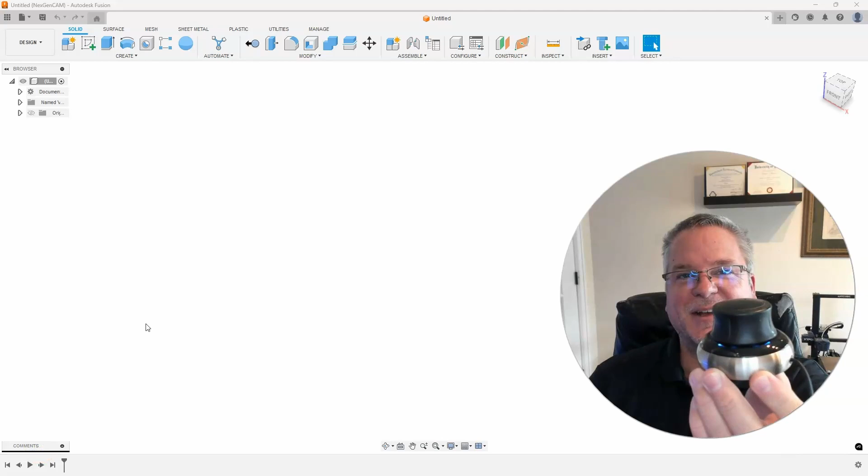This week's video is all about the 3Dconnexion device. Let's take a look to see what this thing can do.

A couple people have reached out to me and asked, how do you get the really nice smooth panning and rotation and zooming that you do inside of Fusion? The reason is because I'm using one of these 3Dconnexion mice that you can kind of see on my camera right here. Now, I've also gotten feedback where people say, well, I invested in one of those, but I found it really difficult to use. The part kept flying off the screen. I could just never get used to it.

That's because out of the box, there's some settings that I personally don't like and I've changed. I think it makes way more sense with the settings that I have set up. I'm going to show you those settings, and hopefully that will help you if you currently have one of these 3Dconnexion mice, or if you think about getting one of them.

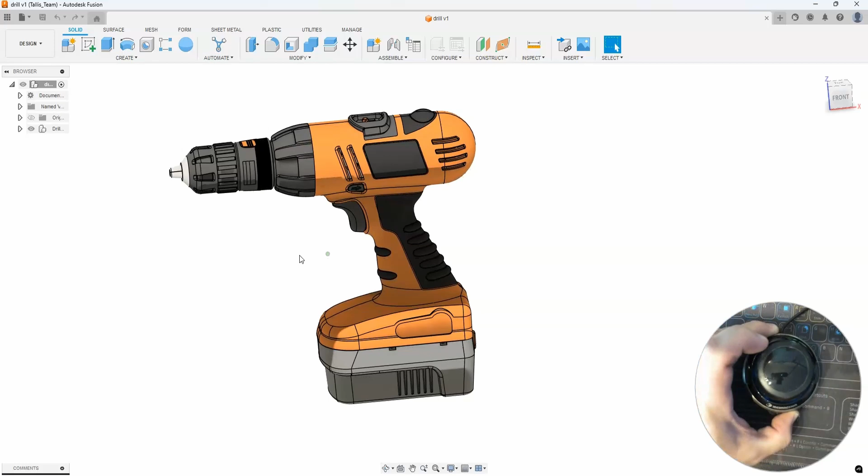You can almost think of this, if I'm going to show it on the camera, you can kind of see a side view. There's this black rubber part here, and that can move in multiple different directions. I always tell people, almost think like you're holding the part in your hand.

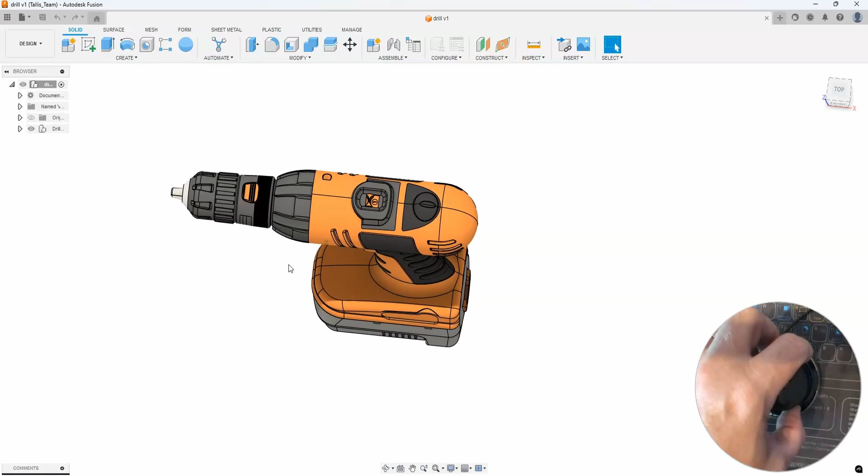So I'm basically holding the drill in my hand, and if I rotate that puck forward, it's going to rotate the drill forward. If I pull that puck backwards, it's going to rotate it backwards. If I rotate the puck to the left, it's going to rotate the drill to the left, and vice versa. If I rotate to the right, it's going to rotate to the right.

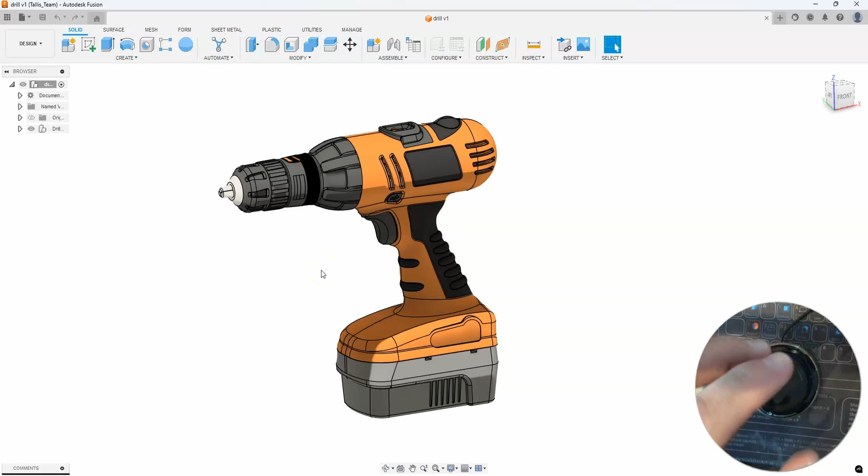Now, the setting that I've changed, and I'm going to show you how to do this, is the zooming. What I basically do is I lift up on this puck, so when I lift up on the puck, I'm pulling the drill toward me. And if I push down on the puck, I'm pushing the drill away from me. This is the setting that I think really does make things make more sense, in my mind at least.

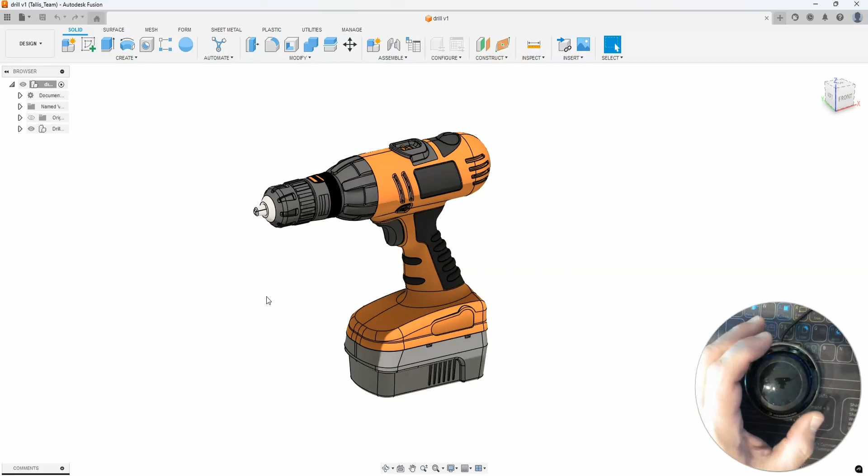So let me go ahead and show you how to change these settings. In my taskbar, I have the 3Dconnexion, in this case SpaceNavigator. I'll go ahead and open those settings, and you'll notice here it says desktop. Actually, the first thing you'll notice, it says discontinued device. My device, I've had it for so long, they don't actually make this particular version anymore. They have newer, better ones, but it still works, so I still use it.

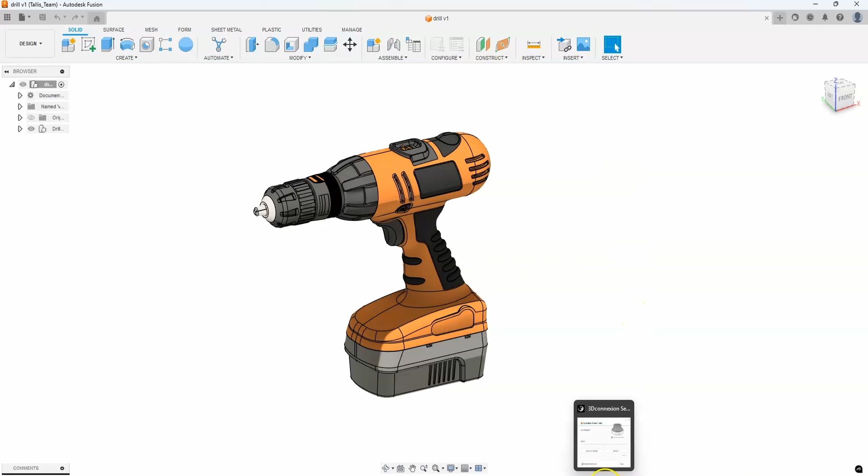You'll notice it says desktop. So this is the first thing you want to make sure, is that it says Fusion. I'm going to go ahead and click on my Fusion tab, and then bring this back up, and now you can see it says Autodesk Fusion 360.

You can change the speed right here of how fast it reacts. If I drag this to the left, and now I'm twisting, you'll see it's rotating fairly slow. If I drag this to the right, now you're going to see it rotates very fast. So that's that first setting. I kind of keep mine right in the middle, it works pretty good for me.

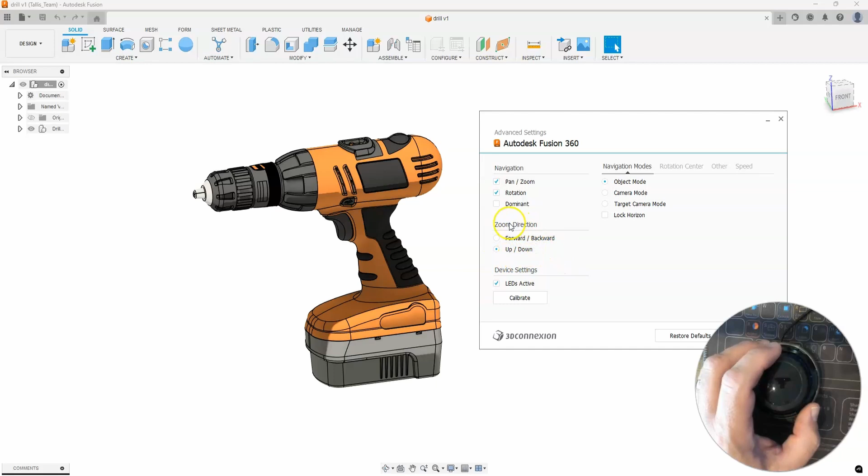Then I'm going to go into the advanced settings. Okay, this right here, zoom direction. This is the setting that I change. Usually out of the box, it's set to forward and backward. What that means is you basically are pushing the puck forward and back to zoom.

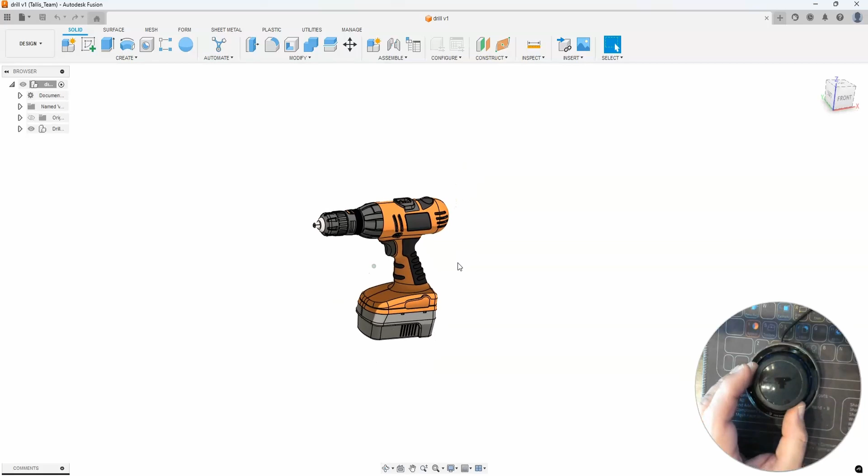Okay, I'm going to show you what that means. I'm going to close this off and rotate. Now I'm basically pushing the puck. If I rotate this a little bit so you can see, I'm pushing the puck this way, and then pulling it back toward me, and that's the zoom.

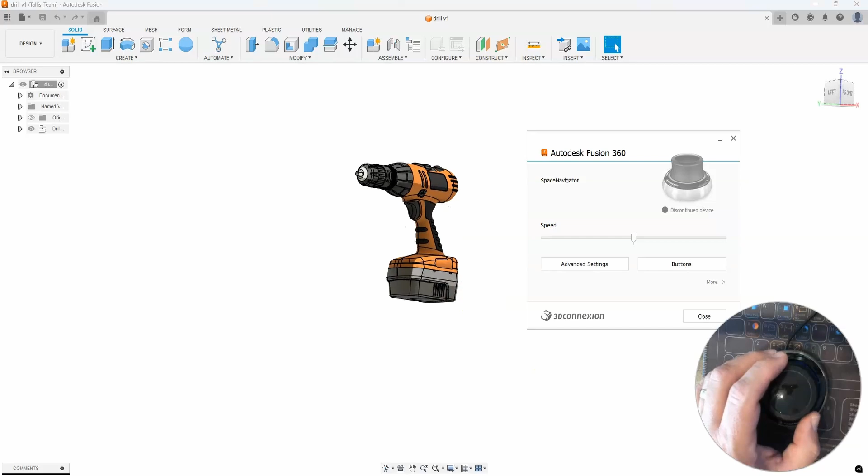Instead of up and down, now up and down moves the drill up and down. I don't know if I'll be able to do this because I'm so used to the other way, but if I'm rotating, you'll notice the part just kind of zoomed out of the way. It's like sweeping and trying to bring it toward me and rotating it. This is what causes confusion for people, because they're trying to rotate, and as they're pushing to rotate, it's pushing the part and zooming it away. So I personally recommend changing zoom direction to up and down.

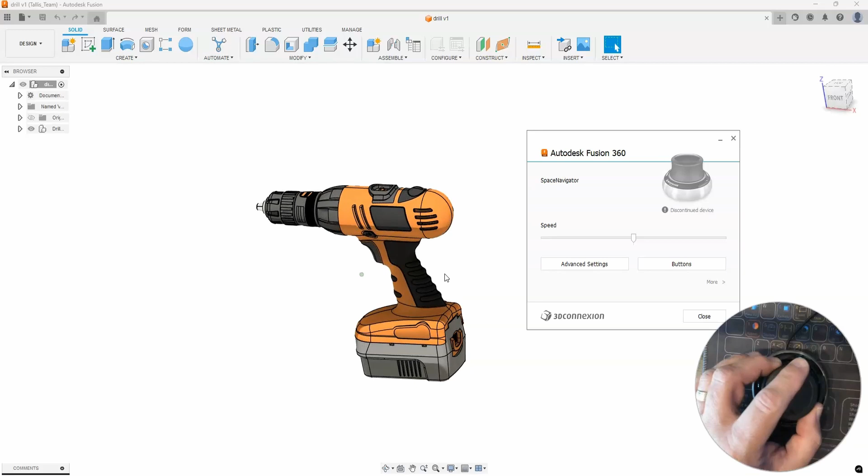That is where I'm lifting up on the puck to pull it toward me, and pushing down on the puck to push it away from me. Then the rest of the puck movement is rotation, so I'm rotating to the left or right. I'm pushing the puck forward to rotate the part away from me. I almost feel like I'm holding the part in my hand and moving it around. That alone will save you a huge amount of headaches.

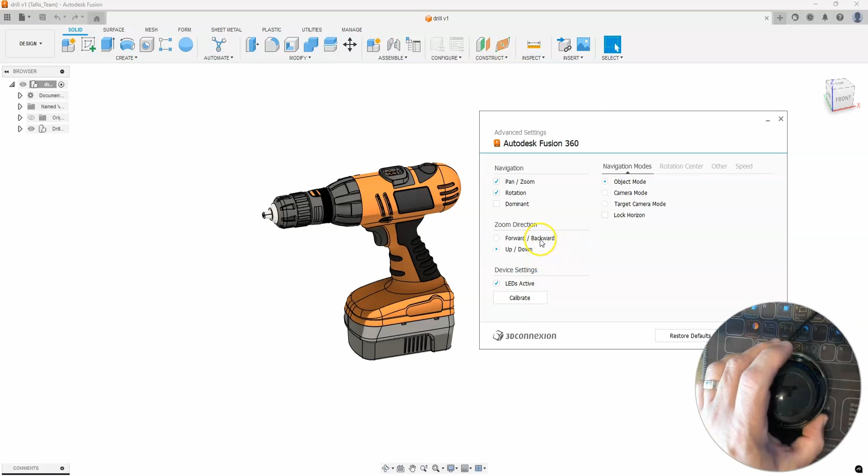If you currently have one or are interested in purchasing one, definitely change it to up and down and give that a try. Some of the other settings are under the rotation center, and you can see it's set to auto.

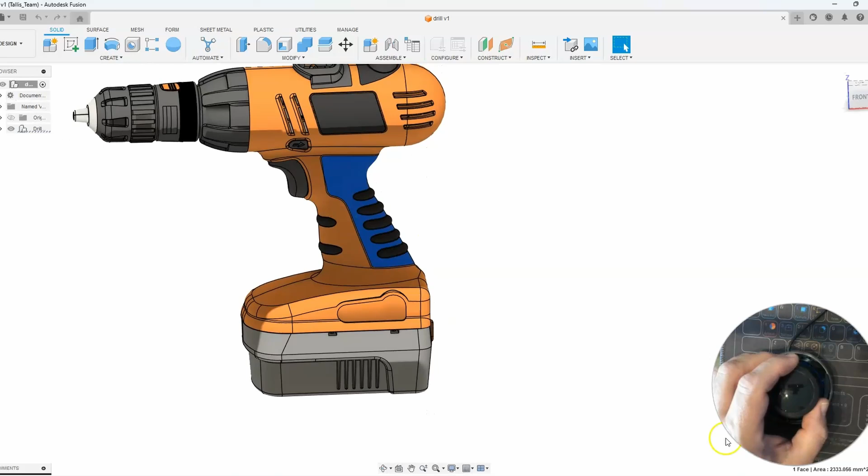That's kind of this dot that you see here. It's automatically rotating around that point. If you change it to use selected item, it will rotate around that particular selected item. I usually just leave it set to auto.

You can also see it says always show on motion or hide. So I might turn that on to show on motion, and you can see the dot appear, but as soon as I stop rotating, it goes away. Or you can say hide, and it just won't show up at all. I usually leave it on show on motion.

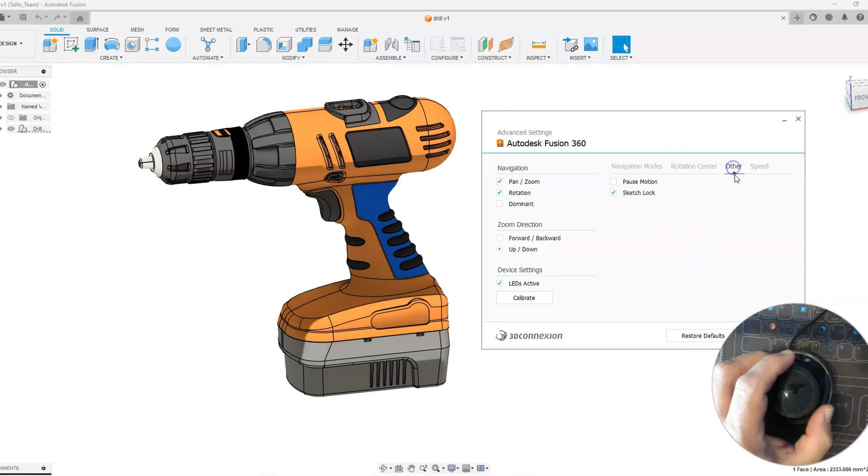If I go into the other tab, you'll notice we have pause motion, which really doesn't make any sense. And then we have sketch lock. I'll close this and bring up a sketch. Let's go ahead and create a sketch here, and I'm just going to draw a quick circle.

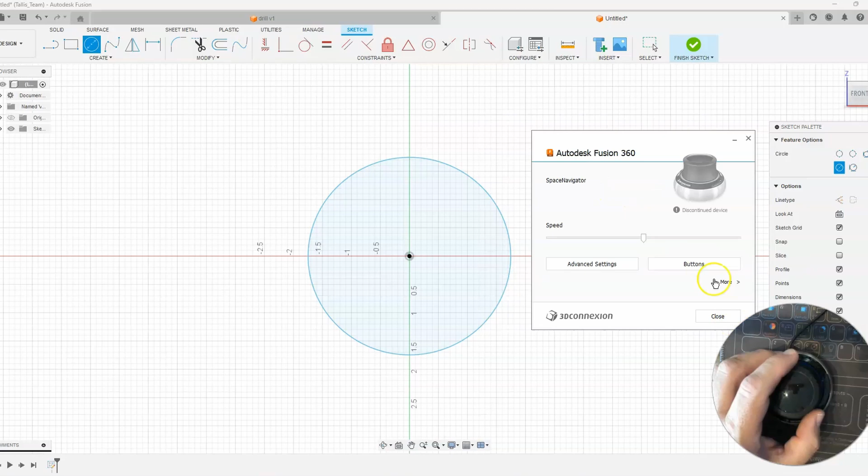Now I'm going to rotate with my puck, and you'll notice that it's not rotating. It is allowing me to pan and zoom, but as I'm pushing the puck forward and back, it is not rotating that. If I come in here and change sketch lock, turn that off, now you can see I can actually rotate in my sketch.

So again, it kind of depends on your design process. If you want to keep your sketch more isometric, or if you want to keep it locked down more orthographic, that's what the sketch lock option does for you.

Lastly, we have speed, and you can actually adjust the speed on each of these settings. You'll notice I kind of slowed down my zoom speed ever so slightly, so it doesn't zoom quite so fast. You have the ability to control all of these, and even control whether they're active or not. By default these are reversed; if you need to, you could change those, but they're usually set correctly.

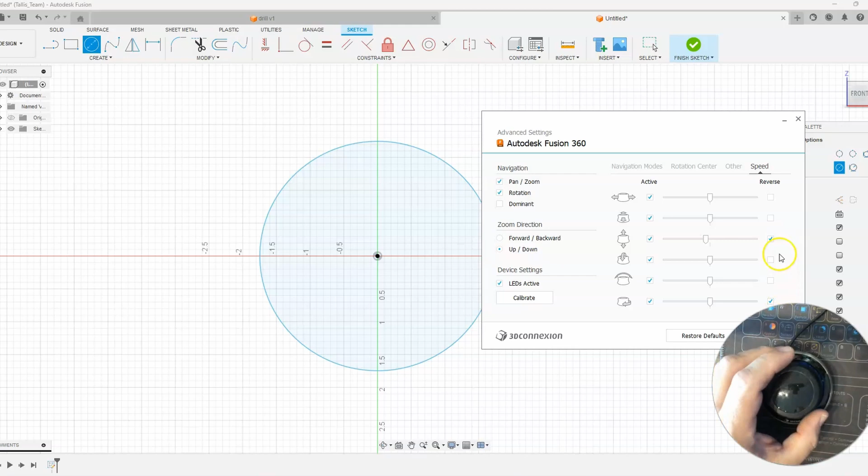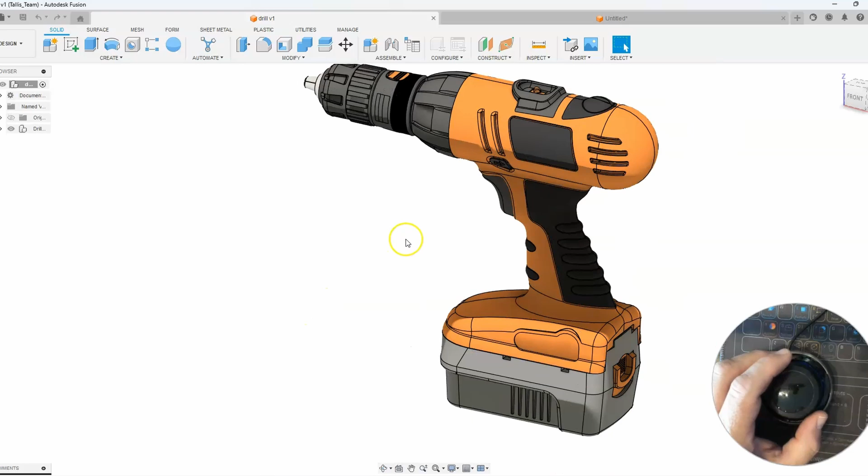So anyways, that is my recommendations for setting up your 3Dconnexion to be able to pan, zoom, and rotate very quickly and easily. I find the 3D Connexion mouse really does speed up the design process, not having to scroll with your mouse and all that. You can just move your cursor and it zooms right to where you want it to go, and you can pan, zoom, and rotate much, much easier.